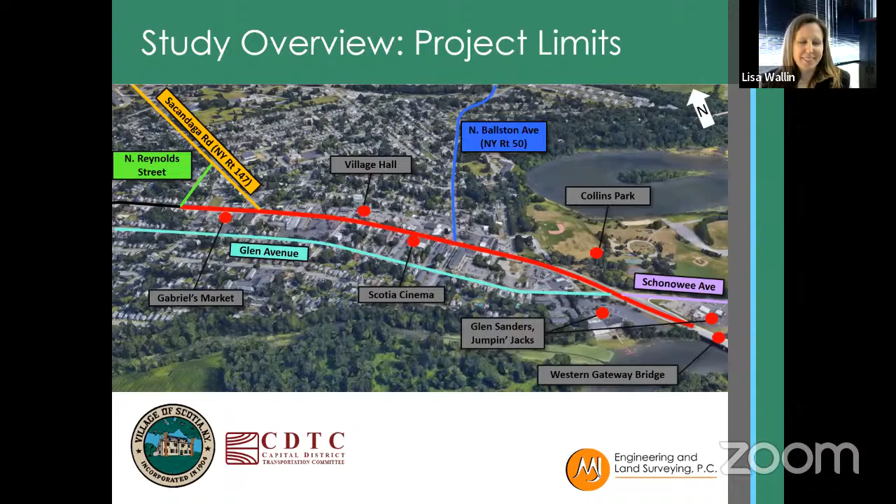Our project study area is up here on the map in red, and you can see it spans Mohawk Ave between the Western Gateway Bridge coming from Schenectady and further west all the way out towards North Reynolds Street. A few points of interest out just after the bridge, if you're familiar with Glen Sanders and Jumpin' Jacks at that big intersection, Collins Park is located there. Scotia Cinema and Village Hall is central to the study limits. And then out west, Gabriel's Market, if you've ever been there, it's a great little store.

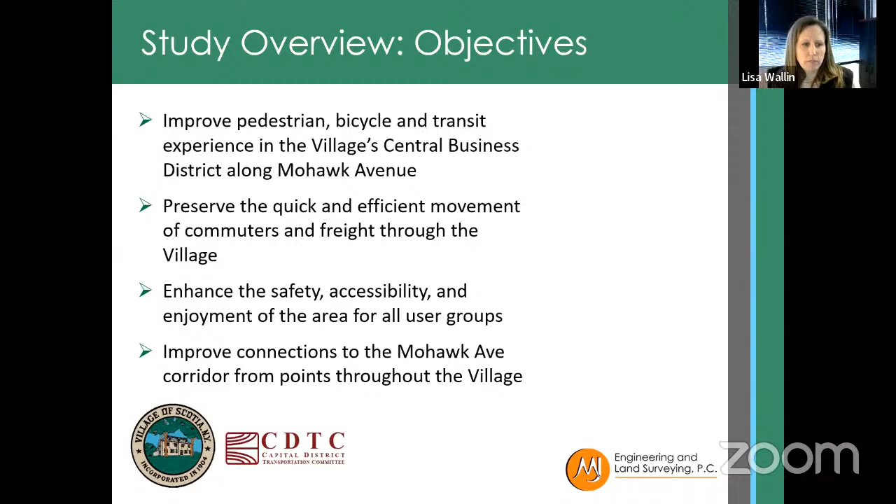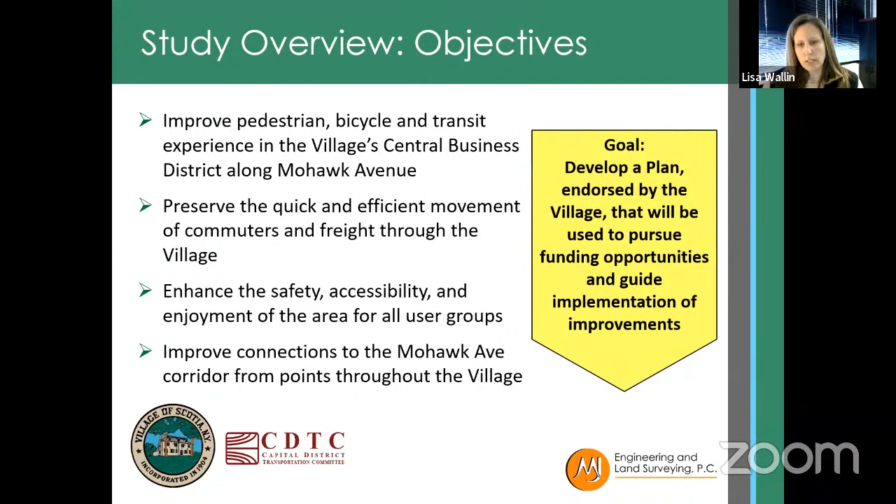Project objectives here: we're looking to improve pedestrian, bicycle, and transit experience within the village's central business district, preserve the quick and efficient movement of commuters and freight through the village, and enhance the safety, accessibility, and enjoyment for all users of the area. Finally, improve connections to the Mohawk Ave corridor from different points throughout the village. At the end of the day, the goal is to develop a plan endorsed by the village that they can use to pursue funding opportunities and actually implement some of the recommendations.

There have been a few previous studies completed with recommendations focused on this study area. So we've been sure to be familiar with these studies and implement some of the recommendations, or look into and roll those into what we're showing here today. If you're interested in these studies, they are linked on our study website, it's scotiaconnections.com.

Section 1 is right in that business district. There's 2 lanes with parking on each side. It's kind of narrow. That's really where the draw is for people coming in to shop and that sort of thing. Skipping over to section 3, coming off the Western Gateway Bridge, it's very open, 2 lanes in each direction alongside Collins Park there. And then section 2 is really just a transition in between the two.

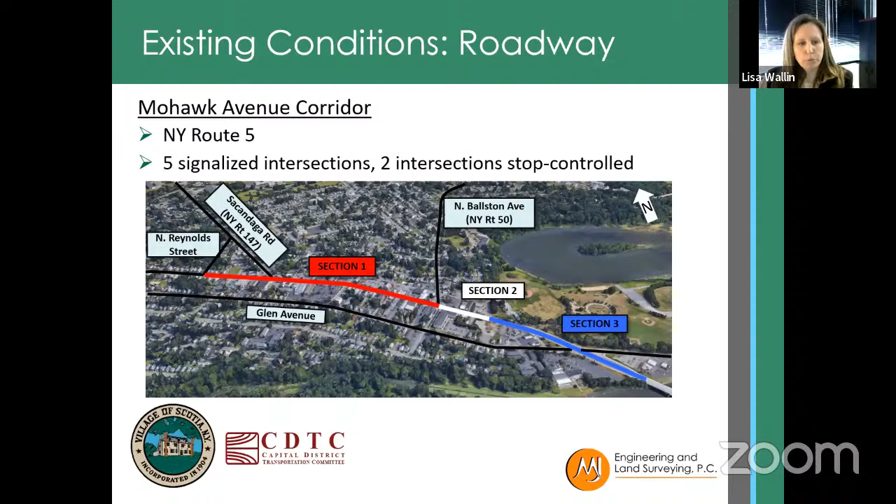In terms of traffic data, there's a lot of numbers on here, but really all I wanted to share with you is that Mohawk Ave, shown in red, has just under 24,000 vehicles a day coming in and out of Schenectady. There are a lot of turning movements associated with Ballston Ave, New York Route 50, and Sacandaga Road which is New York 147. Leaving the project on the west end, we're down to just under 5,000 vehicles per day, so a lot of turning movements happening here.

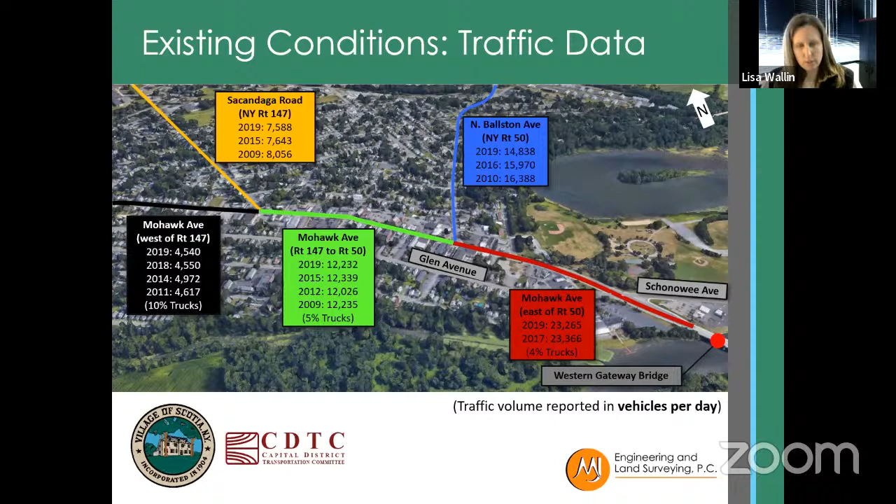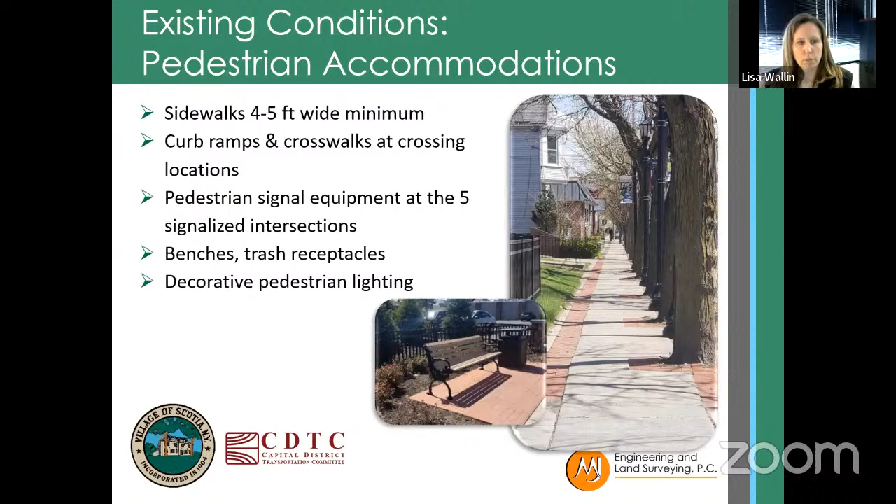In terms of pedestrian accommodations, it's a beautiful walk through the village. There are sidewalks 4 to 5 feet wide, curb ramps, and crosswalks at all the crossing locations at the intersections. Pedestrian signal equipment to some extent exists at all those signalized intersections, and the village has done a great job installing benches, trash receptacles, and some decorative pedestrian lighting.

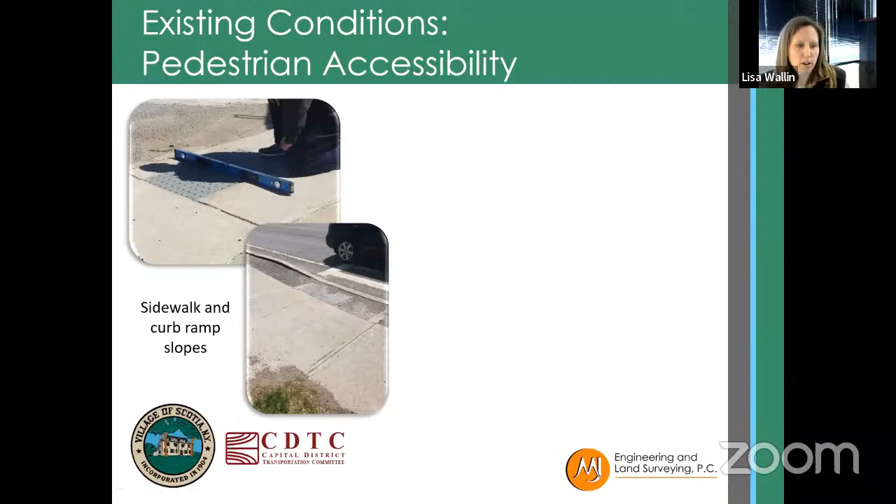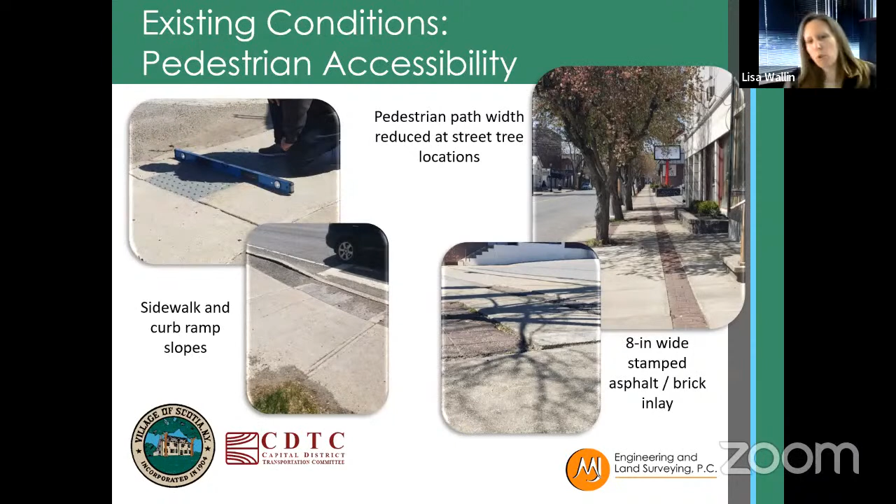In terms of accessibility, we conducted an ADA compliance audit throughout the village. We measured the sidewalk and curb ramp slopes, and there's quite a few that aren't meeting standards right now. We looked at the pedestrian path width in terms of street trees, and you can see that nice decorative brick strip that's been installed. It's not stamped asphalt, it's actual brick, and it has sunk down and settled over time. So between that and those street tree pits, the flat compliant walkway necks down to almost 2 feet in many locations.

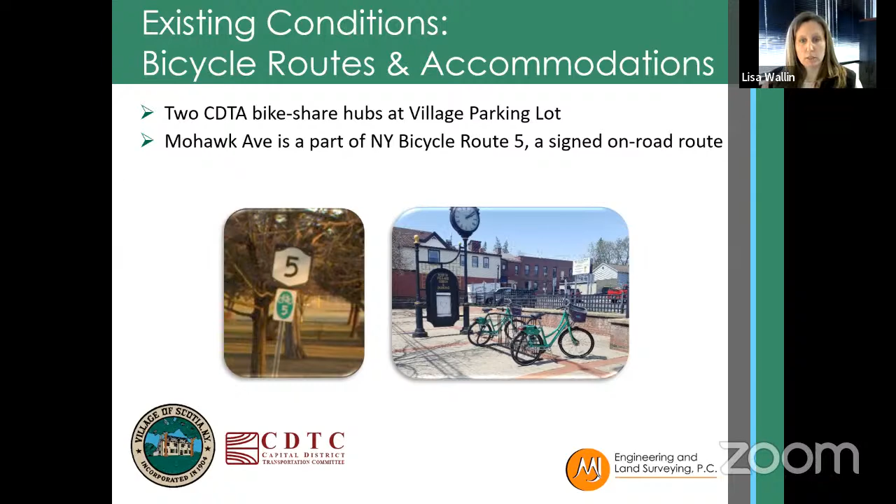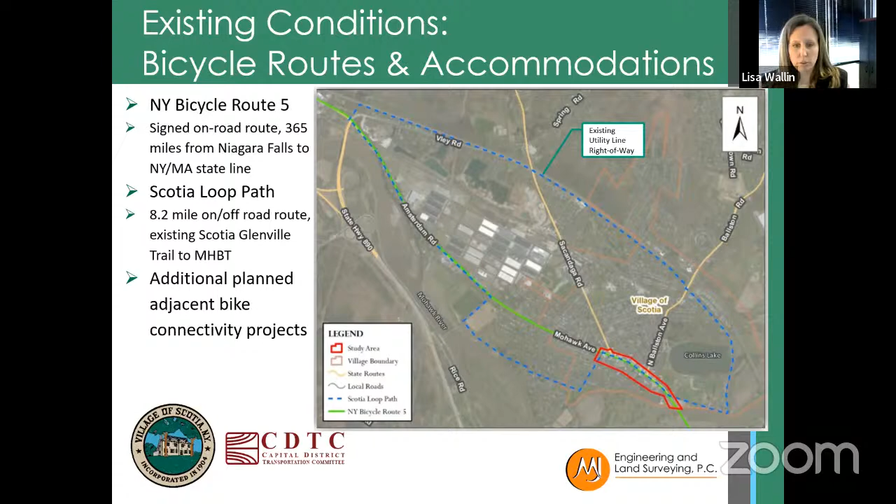In terms of bike routes and bike accommodations, there are 2 bike share hubs at the village's public parking lot, which is central within the study limits. Route 5 through our study limits is signed as New York Bicycle Route 5. On a larger scale, here's a map of the village as a whole with some bike routes highlighted. Our study area is that red shape down at the bottom, and you can see the green line is bike route 5 all the way through Scotia headed out towards Amsterdam. CDTC's bike plan highlights a planned future Scotia loop path, shown in blue here, and you can see that cuts right through our project limits.

At our first public workshop, we presented the existing conditions and tried to get an idea of how people felt about walking and biking through the corridor. There were several live polls. In a nutshell, several people walk daily through the corridor and don't necessarily have an issue with it, just that the condition has degraded over time. But bikes, on the other hand, people either say they don't bike, and many said they don't bike because it's unsafe. So that was interesting.

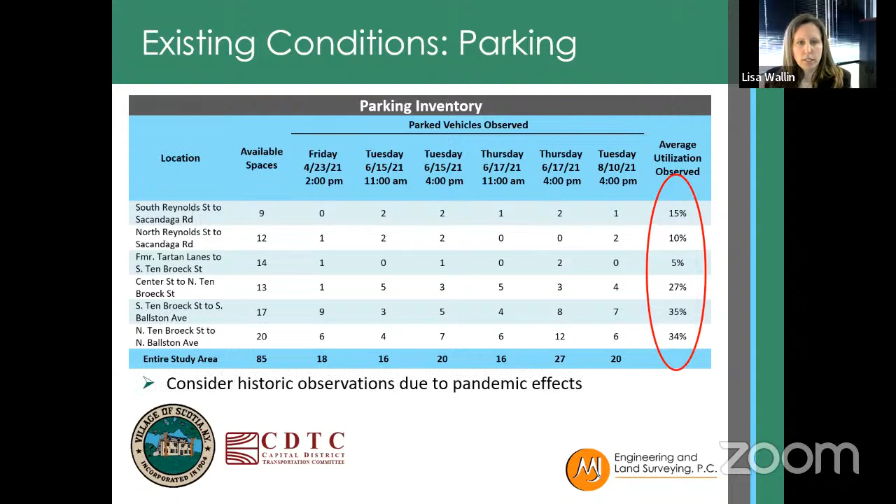With many complete streets projects, we always need to look at parking and what's happening there. Over several days, at different times, we observed how many people are parking and what times of day. The moral of the story: it's a pretty low parking utilization rate, definitely below 50%. The higher rates, around 35%, are near Village Hall and the Mohawk Tap Room, a restaurant that people frequent there. We did consider historic observations due to effects of the pandemic from both the village and the public, and one of our live polls cemented that idea in—people said there's sufficient parking within the project area.

At the end of that first public workshop, we reviewed complete streets definitions, gave examples with photos, and explained that there is a modal hierarchy to implementing complete streets features. Just because everything looks great doesn't mean everything's going to fit within a specific corridor. We also explained that many of those features have maintenance implications for the village moving forward. Then we asked the public what they felt was needed. We had strong feedback for curb extensions, some bike infrastructure, either bike lanes or shared use lanes, and we also talked a little bit about bus pullouts, since there are quite a few CDTA bus stops throughout this corridor.

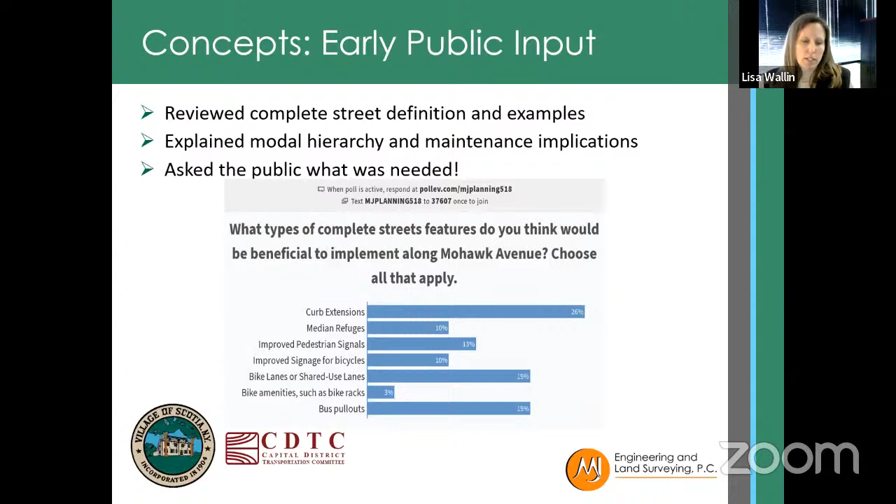So we took that feedback and began to develop the draft concept plan through last fall, coordinating with the village, state DOT, and CDTA for some early concepts before distributing a draft plan to the study advisory committee at the end of the year.

A few main points of feedback we got back from some of our coordination: DOT did not recommend putting mid-block crosswalks in that 4-lane section, section 3, if you remember back to the early map, and talked about considering PSAP recommended safety measures. We've asked for clarification on that, because there are safety measures recommended for crosswalks in a 4-lane section. They also made sure to let us know that there's planned future development for some of the vacant properties, so we should add that into the plan.

CDTA, we asked them about the bus turnouts, and their opinion is that they do not prefer bus turnouts. That's because once a bus exits the travel lane, there is sometimes a delay associated with getting back into the flow of traffic. So they do not prefer those.

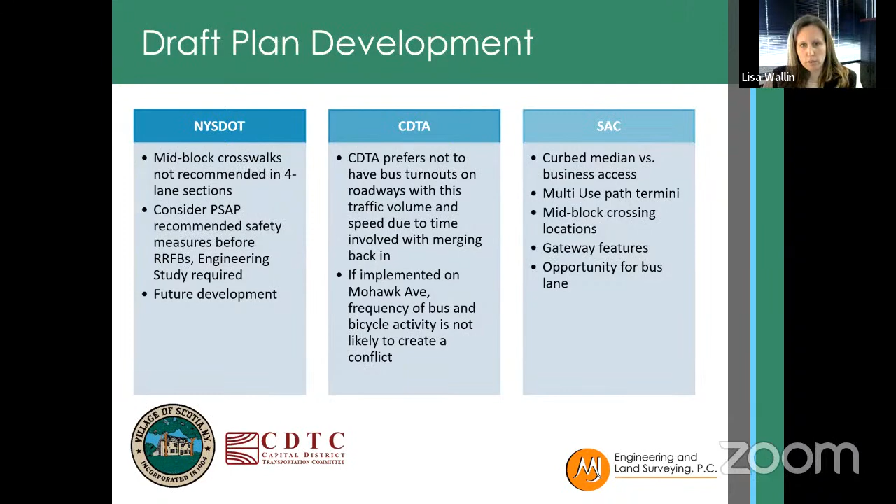We also had some great conversations with the study advisory committee, mainly based around curbed median versus business access, termini of multi-use paths, actual locations for mid-block crossings, and gateway features.

So moving on to the actual plan, we are recommending corridor-wide to reconstruct those sidewalks and provide an ADA compliant pathway for pedestrians, maybe moving that decorative brick strip out to be a decorative hardscape buffer along the curb line instead of within the walking pathway.

I'm going to talk about the intersection of Schonowe in a later slide, but we are recommending that bike traffic from the Western Gateway Bridge, which does have a multi-use path on it, be directed out to Glen Avenue. It's a residential street, much quieter than Mohawk Ave, no truck traffic, and we're recommending shared use lanes on Glen Ave.

And then corridor wide, looking at relocating lampposts and assessing the need for additional features. Some of the business owners asked for that. And of course, a new wearing course and striping throughout.

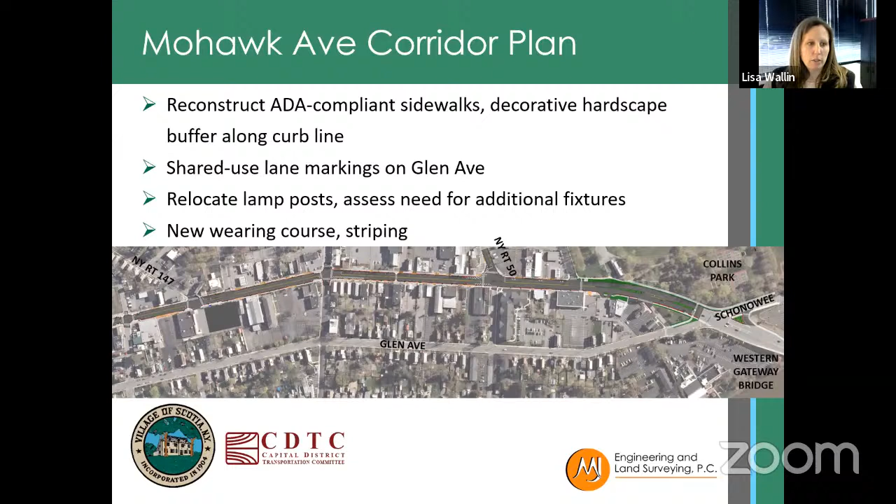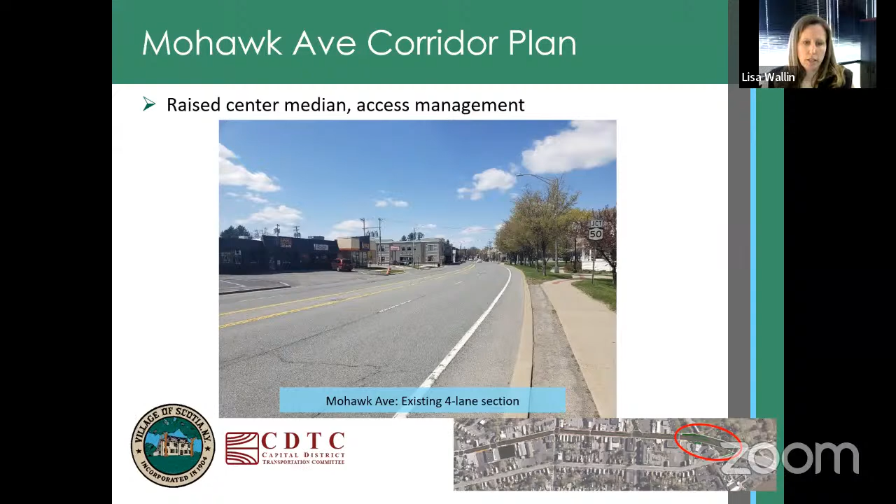The corridor plan does include a raised center median. There is a key plan at the bottom here, you can see there's going to be a red circle highlighting where specifically we're talking about. But here's a photo of that 4-lane section coming off the Western Gateway Bridge out of Schenectady.

Here's a concept plan of what that median could look like. You can see we did have to add that left turn entrance into the businesses, particularly that one business there that does not have another means of access. So we added a turn lane for them.

And here's what a section might look like. You can see the center median, the multi-use path on the right, the sidewalks on the left.

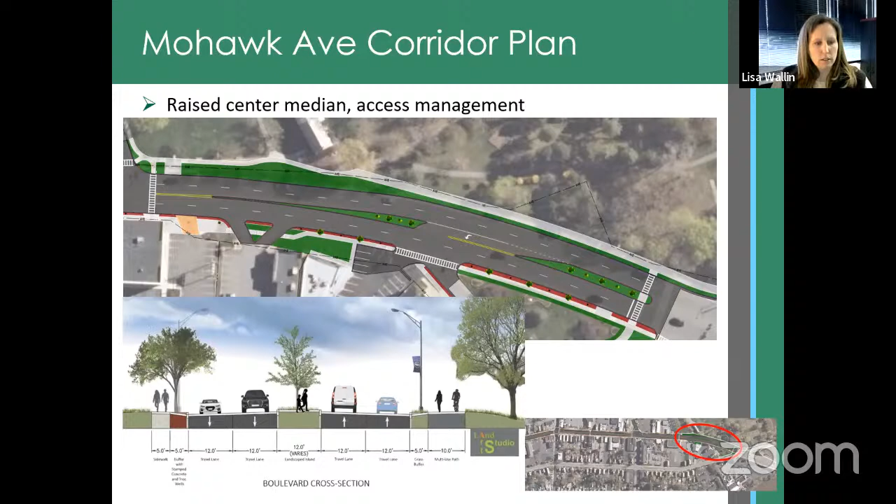We are recommending 2 mid-block crossings. The first is within the 100 block where most of the pedestrian traffic is occurring. The second at Collins Street is just across from Collins Park. The reason for that is there is a lot of documented foot traffic across the street here, and a lot of it is kids running back and forth from the park to Dunkin' Donuts and to businesses on the other side. So we felt that this was warranted.

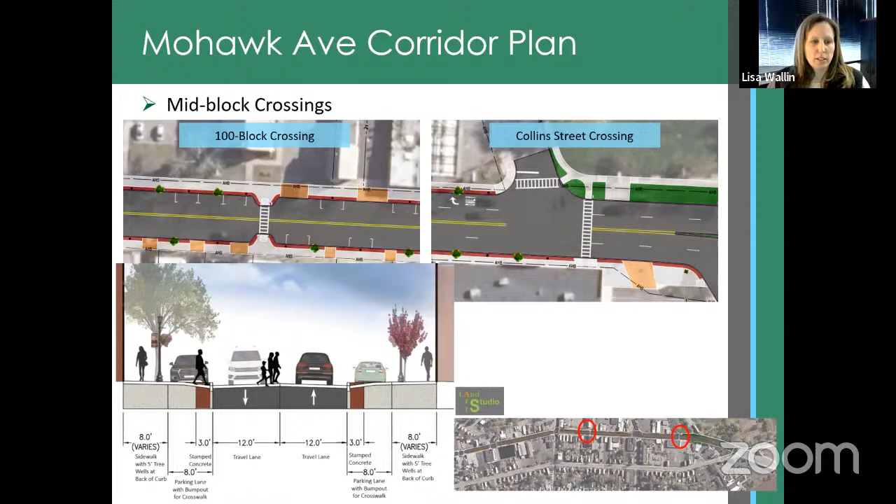Mary Moore Land Art Studio put together this nice rendering of the 100 block crossing, and you can see those curb extensions really tighten up that crossing for pedestrians.

The corridor plan also includes a few amenities and gateway improvements. When you're implementing curb extensions, it gives you a lot of space for nice things like street trees, lights, planters, bike racks, benches, that sort of thing.

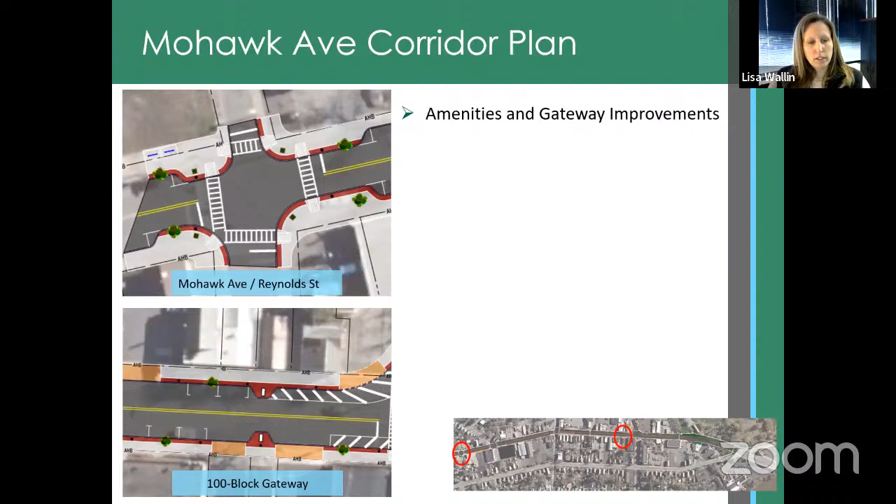We did get a good comment from the business district that they wanted a gateway treatment as you enter that business district, which is just adjacent to the Route 50 intersection. So you can see down here on this plan, those two curb extensions, it's not for a crosswalk, but for a gateway feature. And Merit Land Art Studio came up with this nice rendering that got some excellent feedback.

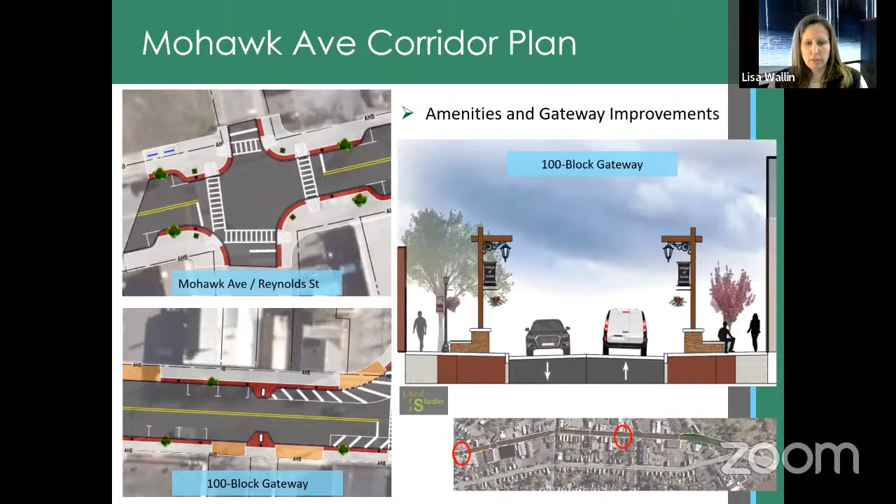Now back at the Schonowee and Glen Ave intersection, we have some different improvements here. The multi-use path will be extended to connect to various multi-use paths within Collins Park. This slip ramp from Western Gateway Bridge onto Schonowee, we're proposing to modify that curb radius a little bit. It was tough for delivery trucks to make that turn.

And the island itself, it's really just a flat asphalt surface, kind of ugly right now. So we're proposing to put a matching hardscape buffer, some landscaping, and bikes coming to and from Schenectady would be routed through this island to eventually connect to Glen Avenue.

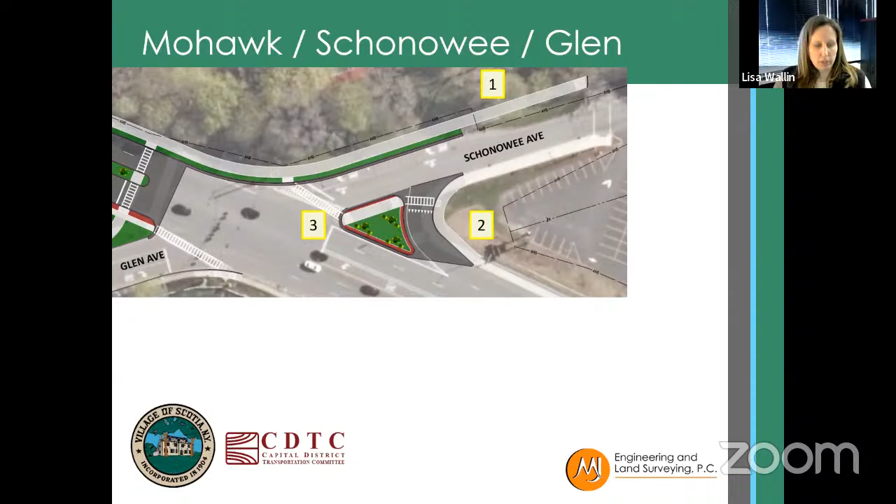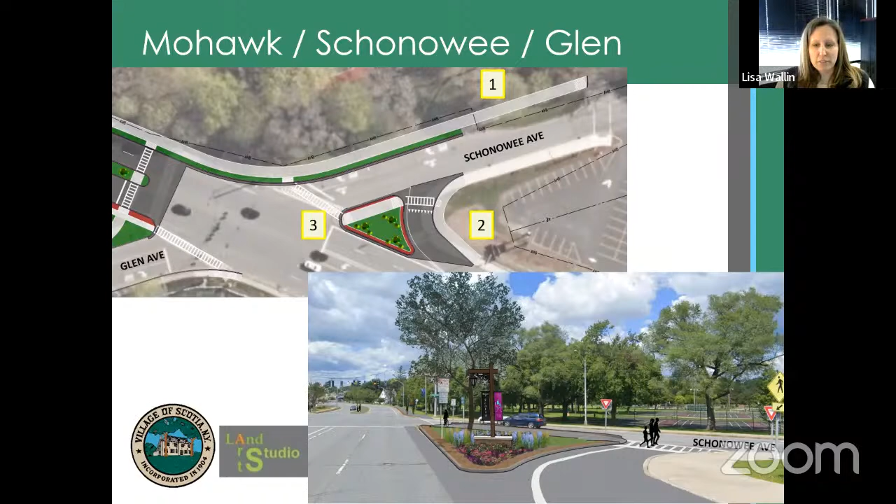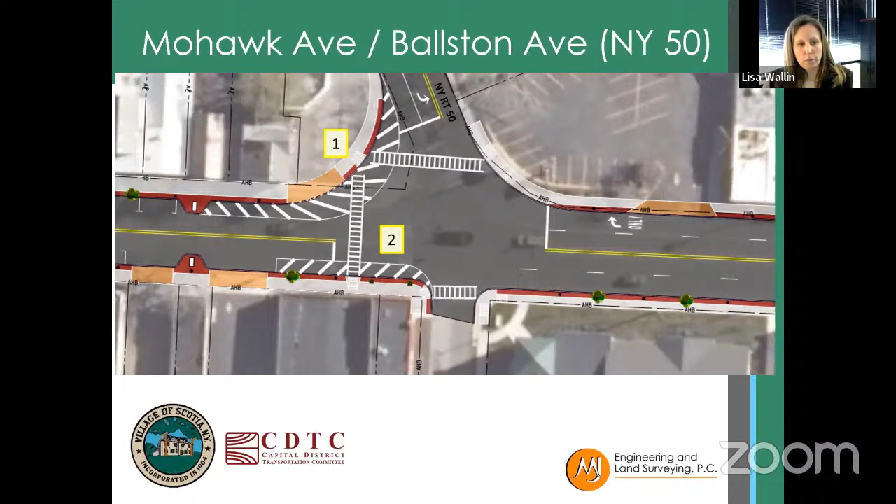This striped curb extension is for an existing CDTA bus stop. A bus could pull off into this striped area, and when loading operations are complete, they could pull straight forward because there's a travel lane in front of them. This is also where that gateway treatment would be proposed as you're entering the business district.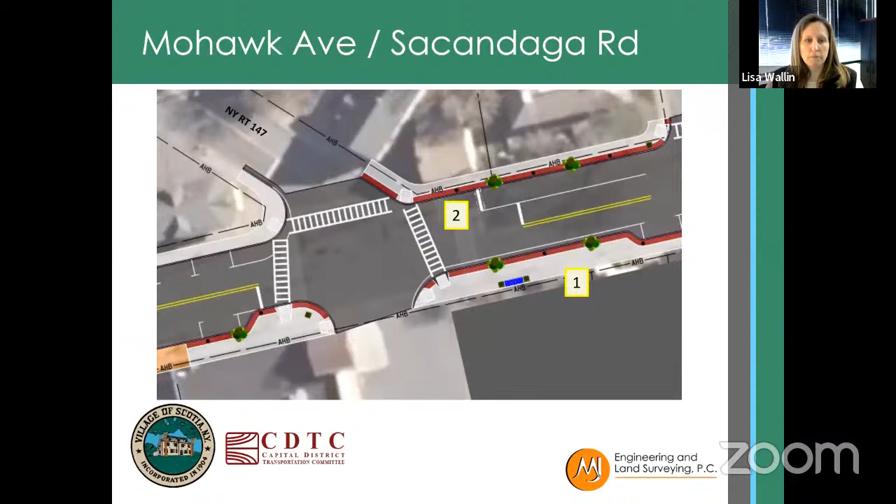Looking ahead, our second public workshop is at the end of March on the 23rd in the evening. The goal is to present these concepts and take public comments on them. After we address those comments, we'll finalize our concept report and present to the village, hoping to do that in mid-April. So with that, it wraps it up. Thank you, and if you have any questions, feel free to contact me. I'll leave this up for a minute—there's a lot of great information on our website.

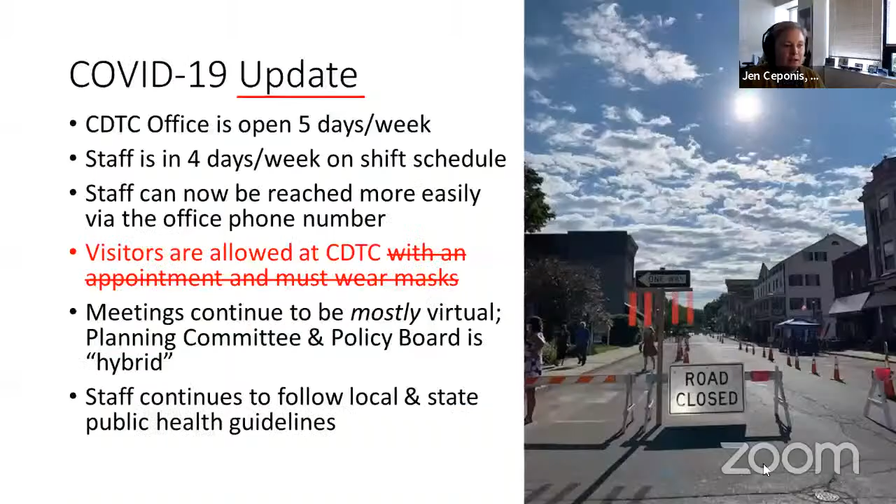Next is an update on the ADA transition plans. Carrie, can you hear me? Sure can. So I just have a verbal update on the program today. We are expecting to receive an initial Saratoga Springs draft document the final week of March. We thought we were done with data collection, but we realized we forgot something, so they're back out this month to collect that final piece. Then the team will be able to put together the draft for our internal review. Around that time, the newly hired interns will go back out in the city of Albany to continue doing the data collection there. We are planning on continuing the program. I have an RFP ready to go for consultant assistance, which we need to renew, and then we will be soliciting municipalities to participate. I don't have an exact timeline, but I expect it to be before the end of this calendar year. And that's it, thanks.

Continuing with the agenda, just an update on the TIP update. As we discussed last meeting, there have been some delays to begin programming because we don't have program funding information yet. We still do not have that information, and the next planning committee is scheduled for April 6th. As things change, we'll update our website and our committees as we meet.